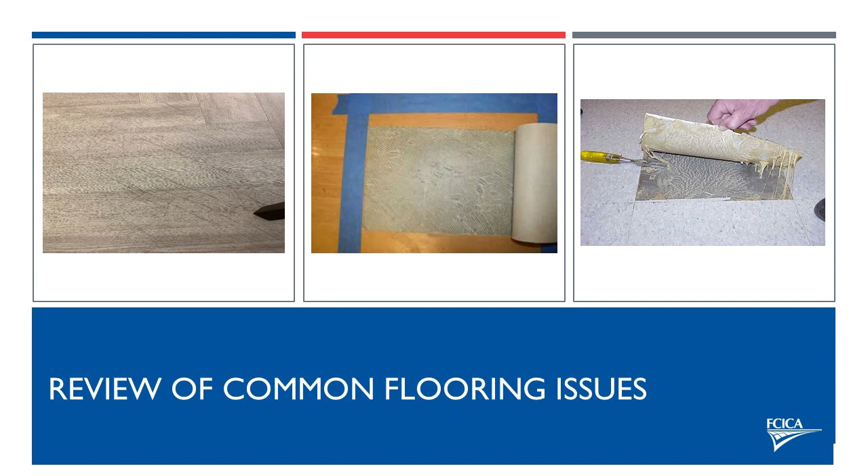So first we're going to review some common flooring issues, but before we do that, I like to take some breaks and do some quick Q&A. So, who is the initial decision maker in the event of a claim? I'll give you a couple of seconds to think about that.

According to the general conditions of the contract and AIA A201, the architect is the initial decision maker in the event of a claim. They're the ones that decide whether a claim should be filed, and they're the ones that should really be driving the claim in a commercial environment.

So some of the common commercial flooring issues we're going to talk about today: surface damage, discoloration, dimensional change, restriction of movement (mainly talking about click and floating floors), indentation, telegraphing, adhesive bonding issues, and substrate flatness issues, which we're going to talk about a lot through all of these.

One thing I want to point out is we're not going to talk about manufacturing defects, because you could have a whole other presentation on that. From my perspective, that's not something within the control of any contractor. A commercial product defect is an entirely different issue, and there's nothing a contractor, architect, or designer can do to avoid those. That's on us, the manufacturers.

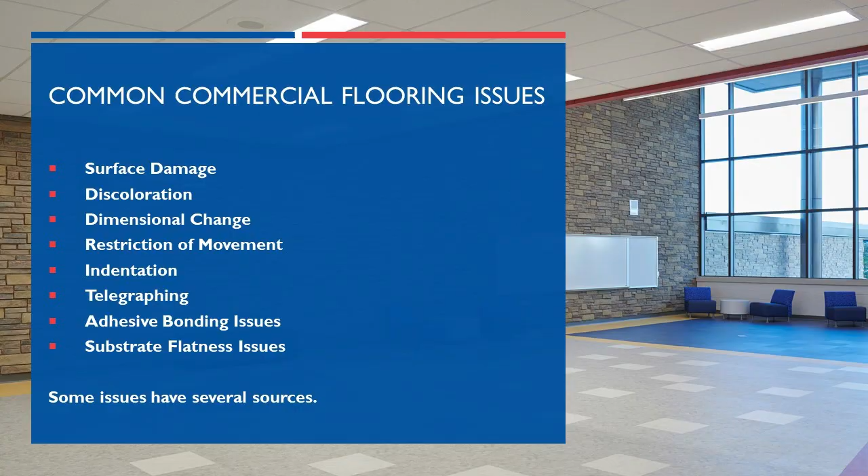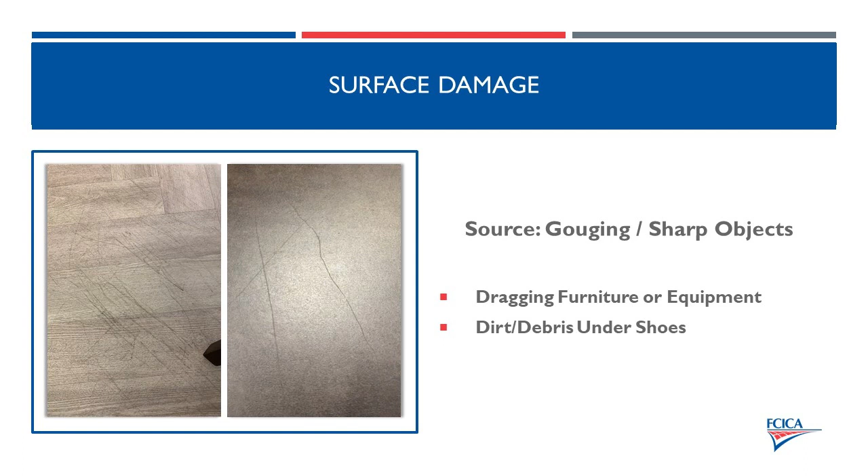So the first one we're going to talk about is surface damage. The first source is gouging or sharp objects, dragging furniture or equipment, or dirt and debris under shoes. Obviously, the majority of the time this is not a manufacturing defect—it's a site issue, but it's a pretty obvious one. I don't think there's any question about who's to blame and how to avoid this.

But this is a big one: improper or dirty floor protection is a really big issue, and it's something I see a lot in commercial environments, keeping in mind that we consider education a commercial environment, and multifamily is usually installed by commercial contractors, so we consider that a commercial installation as well.

Usually it's because of improper floor protection—in some cases no protection at all, which on the bottom right is just metal—or the floor protection for the specific piece of furniture is nylon or hard plastic.

The picture on the far left was in an elementary school, in a kindergarten classroom where they had wobble chairs to keep the kids stimulated while learning. The problem is wobble chairs are plastic—they pick up dirt and debris that the kids track in from outside, and it basically becomes sandpaper. If you see the purple one flipped upside down on top, it almost looks like sandpaper. And in the top right, that's a very common floor protector for metal chairs.

The problem is it's hard plastic, and a lot of times—especially if LVT is being used in the space, or really any product that doesn't have a finish and has a higher coefficient of friction—that nylon will be weaker than the surface of the flooring. It gets chewed up and actually transfers to the surface, creating what looks like scratches. It's actually a physical transfer of plastic to the surface, plus dirt accumulation.

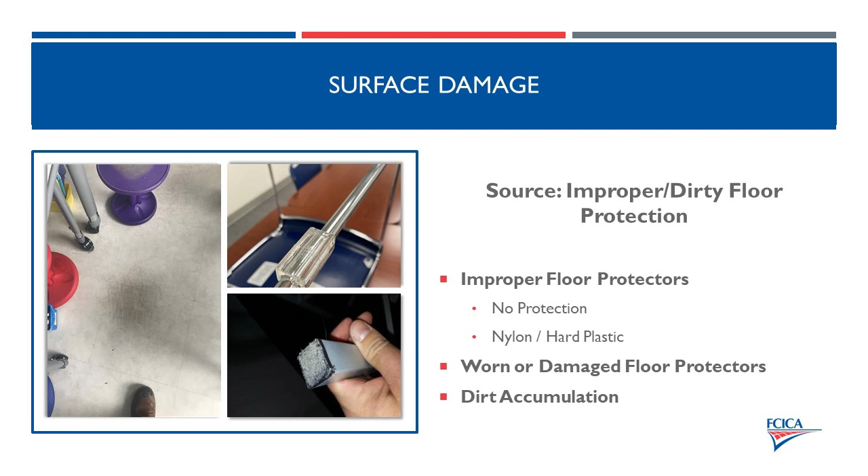So next, we're going to move on to discoloration. The first cause of discoloration is improper maintenance. In some cases, this can be adhesive left behind after installation for glue-down installations, or adhesive related to something installed adjacent to the flooring material.

But a lot of times, like in the picture on the left, it can be a film left behind from cleaning or disinfection. As COVID has continued through the last year and a half, disinfection has become more common in flooring, and it's important to realize you have to clean before you disinfect. If you don't, you're just layering disinfectant on top of it. The picture on the left is an example of when a film builds up on the floor.

This discoloration you see is actually from rubber tires off a hand truck that was spun in that spot, and it cleaned right off once it was actually cleaned. Another source of discoloration we see is film from drywall dust. It's really important to protect floors when wall work is being done, since a lot of times walls are painted or corrected after flooring installation.

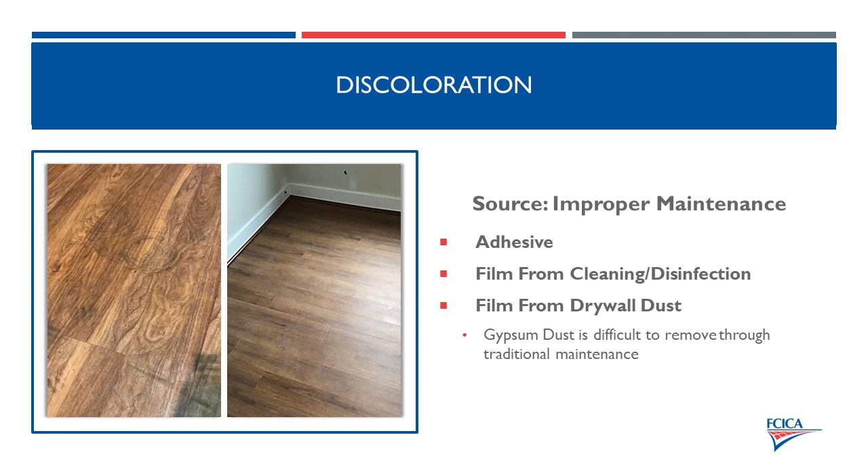Gypsum dust is very fine. It's a calcium salt, so it's very easily miscible in water. If you're just damp mopping the floor, it can spread the gypsum dust all over and create a haze. We sometimes get claims that a floor is hazy or not the right color, when it's actually just a film of gypsum dust on the surface, which is very difficult to remove.

Another source of discoloration is sunlight, UV and IR rays, which cause eventual fading in most floors over time, but natural products are especially susceptible. The picture on the left is cork. The dark color in the bottom left is the original color. The rest of the picture shows what happens after 6 years of direct sunlight exposure with no window treatment and no window films.

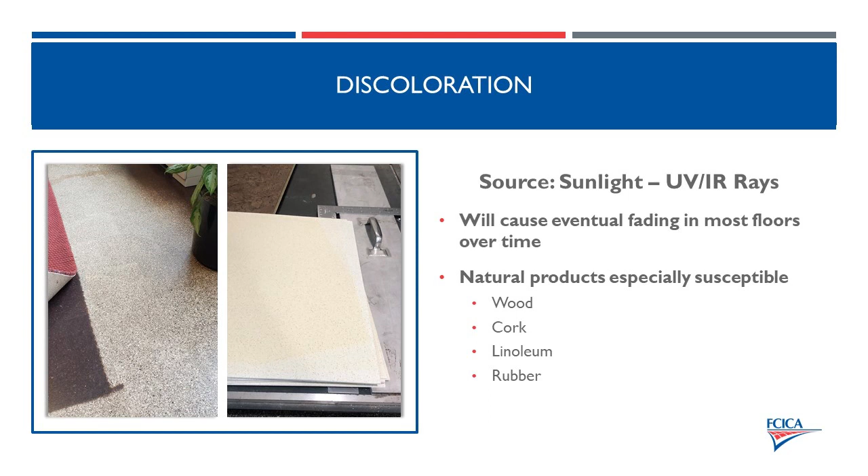This can happen in wood, cork, and linoleum too, though wood isn't a resilient floor and we're focusing on resilient flooring. The picture on the right is a rubber tile. Interestingly, with rubber, UV exposure often darkens the tile, so the darker area is the area exposed to sunlight. This flooring was opened on the job site and sat out in direct sunlight while they finished something else, and came back discolored.

Another, rarer source of discoloration is chemical attack. This can come from foot traffic, really a lack of walk-off mats. That's why most commercial manufacturers recommend walk-off mats, not just because rocks and debris tracked in on shoes can cause scratches and gouges on the surface.

In the picture on the left, you see the darkened area to the right. That's from a freshly paved asphalt parking lot. There were no walk-off mats in the building because the architect didn't like them, and the asphalt attacked the flooring on the surface and discolored it permanently.

You can also have chemical attack from underneath. The picture on the right is VCT tile that was attacked by a high pH in the substrate caused by a waterproofing admixture. There can be all sorts of contamination in the substrate that attacks products, especially vinyl, but even rubber—anything incompatible with the flooring material in the substrate can lead to issues.

Then there's abrasive or caustic chemical usage, which is fairly obvious—if you're using a really abrasive chemical in a laboratory or healthcare setting, that's going to lead to discoloration and potential chemical attack.

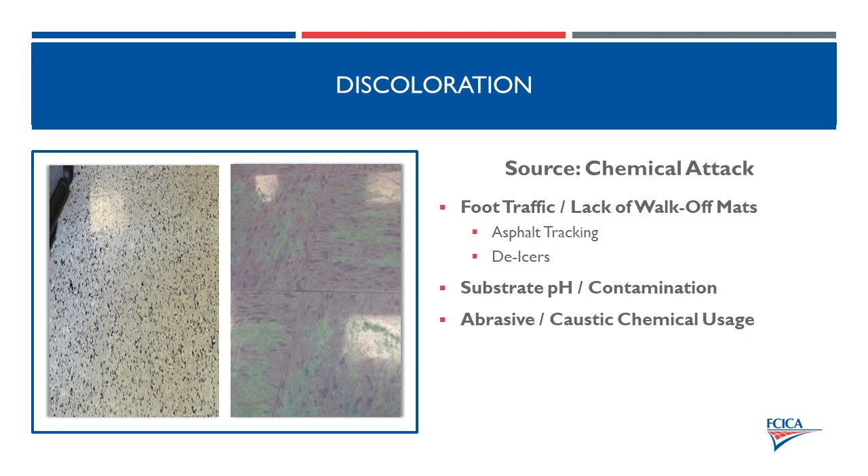So now we move on to dimensional change, an issue that can affect all flooring types—not just floating floors, but also glue-down floors. Click flooring is being used in commercial environments more and more. In fact, ten minutes before this presentation, one of our sales reps sent pictures of a recent installation in a healthcare setting—an outpatient office—where they used click flooring throughout. Click is becoming a lot more common in commercial environments, and I'll touch on it a lot because we see more problems with click than anything else. Dimensional change has two sides: expansion and contraction.

First is contraction. Usually what causes flooring materials to contract is a dramatic decrease in temperature, or in the case of cork, humidity. This issue is especially common in the Northeast and Midwest, where there are very large temperature swings from summer to winter. But it can also happen if the material isn't properly acclimated.

This happens more often than you'd expect, even in summer months, if the flooring or the space isn't properly acclimated. If you take flooring from a very hot environment into a space that's properly acclimated but much cooler, the flooring will contract if it hasn't acclimated and reached equilibrium with the actual temperature of the space.

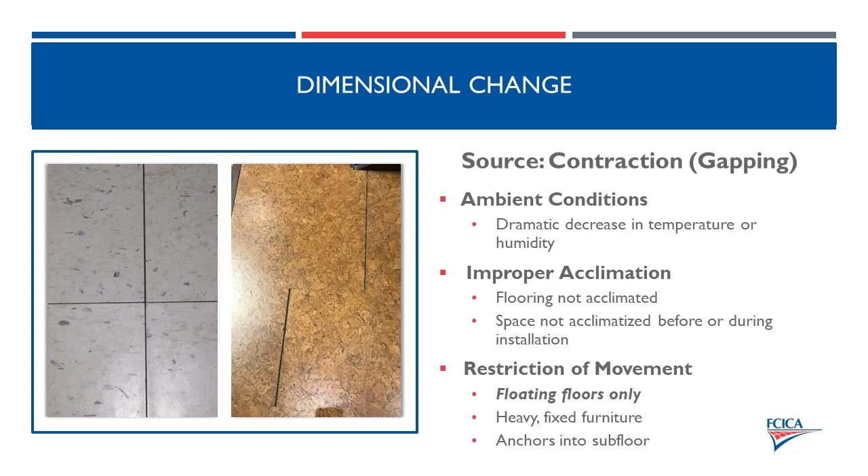So on the other side of that coin, from dimensional change, would be expansion, which usually results in buckling. Same thing, ambient conditions, but it's usually a dramatic increase in temperature.

The picture on the left was from an installation, it's a glue down installation. They were storing the flooring at about 19 degrees at that particular time, and the installers had the HVAC in the units, or the heating, set to 80. So it was going from 19 to 80 and getting installed immediately. Obviously, it was expanding over time and it was leading to some buckling issues.

But this can obviously also happen in click flooring, especially if there are any areas where perimeter expansion isn't being honored, which we're going to talk about in the next slide. But subfloor obstructions can also cause that.

I was at a job recently where the end user didn't want to pay for the prep it would take to properly prepare a difference in height between two concrete pours. They ran the flooring in the direction of that joint, and it was restricting the natural movement of the flooring.

So subfloor obstructions, but also existing flooring, or if you're going directly over a pressure sensitive adhesive, something that's very sticky, that can also restrict the movement of flooring, not allowing it to move over a long space. The flooring, the planks themselves, especially in a floating floor, are going to expand. If they don't have room to move, or if the planks near them can't move with them, then that will lead it to buckle up.

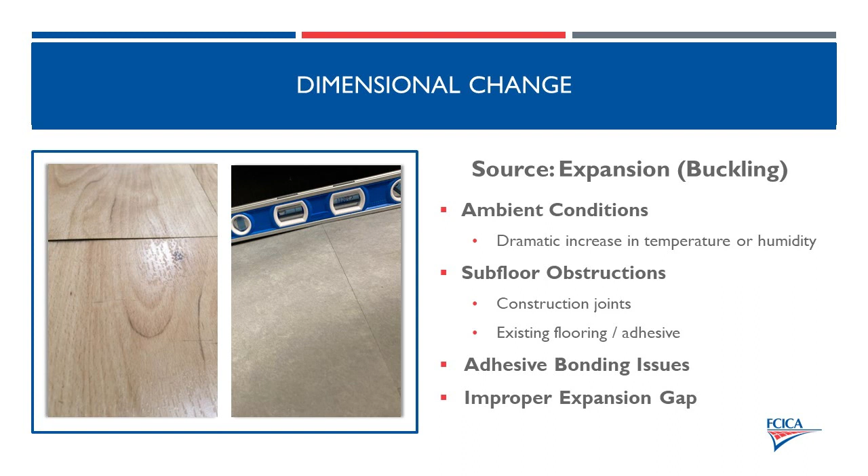But all vinyl products are sensitive to temperature changes, and when you have direct sunlight, that can heat vinyl products up to 120 degrees. And if the adhesive doesn't have the ability to help the LVT resist that natural dimensional change, that can also cause buckling as it moves, especially with large south-facing windows, or really any window that's seeing significant sunlight exposure that's heating the floor. And then, improper expansion.

So restriction of movement is a very common issue in floating floors, and most of the time it's due to an improper expansion gap, which all floating floors need, because you have to think of a floating floor as a gigantic tile, because everything is connected. And that tile is going to move as temperature conditions change.

I've seen installations where I get to the job site and they say, oh, the product's not as bad as it was in the picture. And that's because I came early in the morning before it had received a lot of direct sunlight.

Floating floors are going to move around. You'll more than likely not notice it ever unless you restrict the natural movement of the floor.

So not allowing for expansion, there's usually expansion required around the entire perimeter and any vertical surface. So if you've got a kitchen island in a multifamily environment, or some sort of heavy desk in a commercial environment, that would be restricting movement as well. It's supposed to have expansion around that.

Glass partition walls are a common thing, and obviously there's not going to be a transition or wall base installed against that partition, and nobody wants to see a gap there.

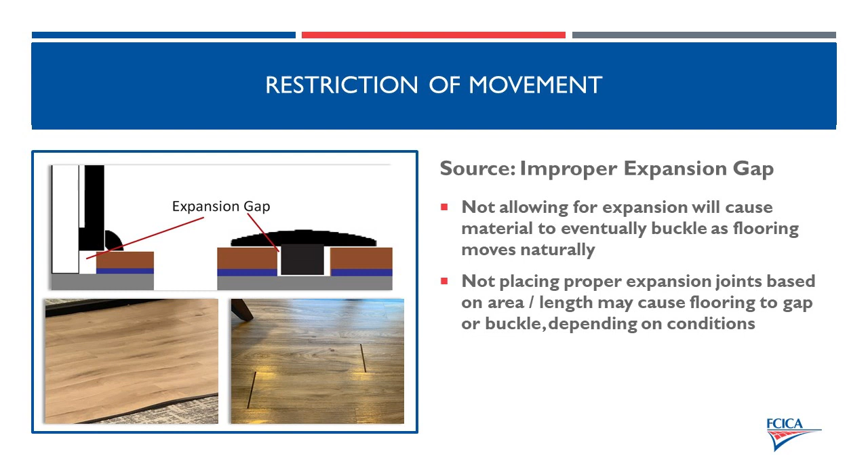And I've seen it, especially in the picture in the bottom right, a very large installation of an older HDF core click and lock product, installed in a 120-foot run, a thick product, and as it was expanding and contracting, once it was in the contracting phase, it separated. It was almost like a straight line as the joint staggered, where the flooring created its own expansion joint, which is what click flooring is going to eventually do if you don't give it the right expansion space it needs.

But another source is anchoring to or through flooring. So obviously, in the picture on the left, if you're going to drill a bolt into the concrete or the plywood through the floating floor, that floor is not going to move, and that can cause buckling or gapping. It's hard to see in that picture, but it was causing buckling up against where the flooring was anchored.

But then also transitions, and this is a big problem with floating floors in commercial environments, is nobody wants an overlap, and everybody wants as minimal a transition as possible. A lot of times with a traditional rubber or vinyl reducer or T-mold, some contractors say, well, I didn't want to glue the flooring down, so I glued it to the top of the flooring. If you use a real strong adhesive, in this case a construction adhesive, a really strong urethane adhesive, you just glued all of those planks together, which a lot of times they're clicked together anyway. But if it's going widthwise or if it's a large section, it basically traps all of those planks and prevents them from moving independently.

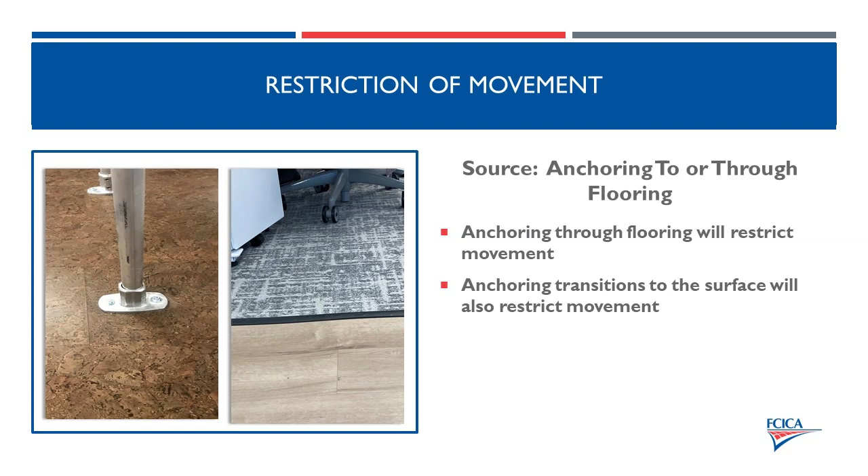All right, so now we're going to focus on indentation, which has a few different causes. The first one I'm going to touch on is adhesive displacement. This is in LVT, sheet vinyl, a lot of vinyl applications nowadays. Most of the time, the adhesive being used is a pressure sensitive or a transitional adhesive, whatever you want to call it. It's usually dry, so this is not necessarily an issue you're going to see a ton in vinyl, but a lot of rubber flooring products and specialty flooring products require a wet set adhesive to work correctly.

So believe it or not, it's still an issue that comes up every once in a while in vinyl as well. But usually when you're dealing with wet adhesive that's causing actual indentation, it's because the open time or flash time for the adhesive wasn't honored, there's too much adhesive and it's taking too long to cure, it's incompatible with the substrate, or there's concrete moisture and pH issues. The picture on the left is a cafeteria where it was going over a moisture mitigation product, which, great, they found they had high moisture. It was higher than the adhesive would tolerate, so they did the right thing. They put down moisture mitigation to cover it, and the adhesive they used was not approved for a non-porous substrate, and it never dried.

And you can see the lines from where the cafeteria tables were moved around for maintenance and all sorts of stuff. It was telegraphing right through, and when you pulled up a tile, the adhesive was totally wet.

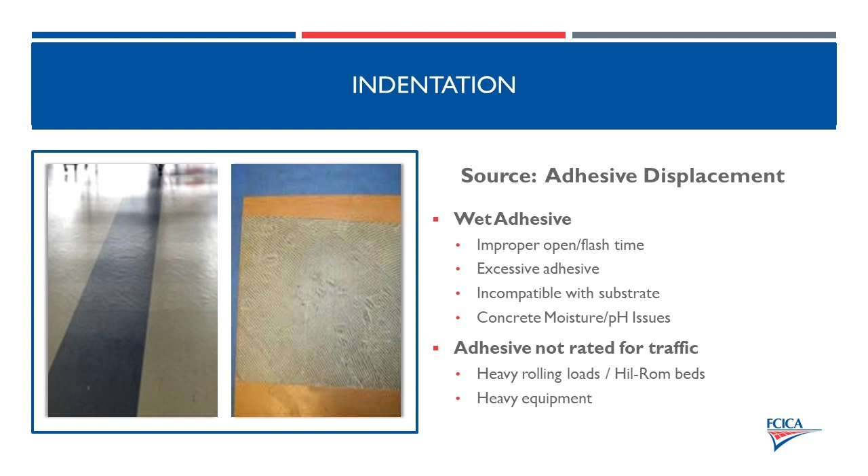So another source of indentation is heavy point loads, and a lot of times it's improper footwear.

It's kind of a weird topic. It comes up every once in a while where somebody's got indentations in material caused by stiletto heels, and we say, look, most manufacturers specifically call out, don't allow sharp pointed objects like stiletto heels to come in contact with the flooring. The picture on the right is an LVT.

The picture on the left is a cork floor. Obviously, cork is really soft, you might expect that. LVT might not, but you have to keep in mind that with a stiletto heel, maybe the person wearing them is light, but you have to factor in the actual flat contact point with the floor. So if you've got an 1/8 inch contact point with the floor and you're 100 pounds, that's 800 pounds of pressure if they're leaning on that heel for any reason. I don't know why they would do that, but obviously that compounds the heavier the person gets.

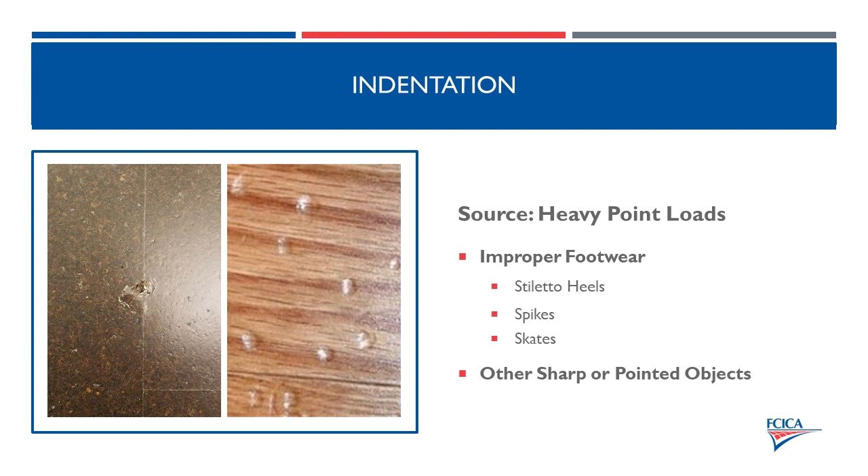But it can also be a problem for spikes, which is really mainly a baseball issue. Most other sports aren't using spikes anymore. But also ice skates. Anything that's going to put a heavy load in a small area, or even a normal load in just a smaller contact point, will lead to an indentation in almost any flooring, other than maybe polished concrete or hard surface tile.

Another source of indentation is improper underlayment. This is mainly a multifamily thing, but you do see it in commercial sometimes, where for sound reduction reasons, a separate sound control underlayment is being used. Most resilient flooring manufacturers have specific requirements for how thick that underlayment can be, what it's made out of. There are some restrictions there.

And the reason is the thicker the underlayment gets, the lower the indentation resistance of the flooring gets, especially the thicker the flooring, the worse that's going to be. So it's really important in these kinds of scenarios to make sure that the underlayment is rated for the traffic, but also that it's at the right thickness, because when you get into 5 millimeters, 10 millimeters, the indentation resistance of that flooring goes down significantly.

As you can see in this picture, those indentations were from what I would consider a standard hotel chair foot. It was 7/8 of an inch in diameter. It was a little smaller than what we normally recommend, but still what I would consider normal. And it was indenting with very little load, because the underlayment was way too thick for the flooring material.

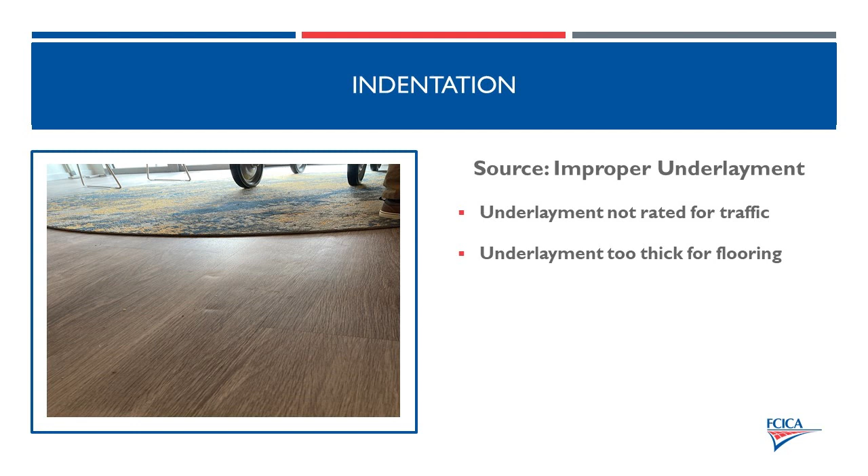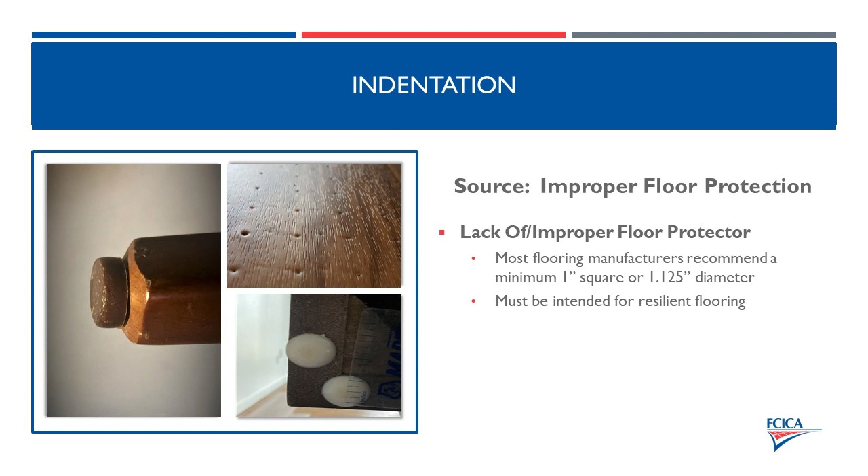So next is telegraphing. The majority of the time when you see really bad telegraphing, it has to do with the subfloor, and it's just improper subfloor preparation. Every resilient flooring manufacturer is going to say something along the lines of make sure you're patching low spots, there's going to be flatness requirements, but it's also going to say make sure the floor is smooth.

And you install the LVT with a water-based adhesive without ever really patching it. The LVT or whatever flooring product you put over the top is going to trap all that moisture in the wood, and just like it would if there were a dramatic increase in humidity, it cupped because the moisture had nowhere to go. But this can also happen.

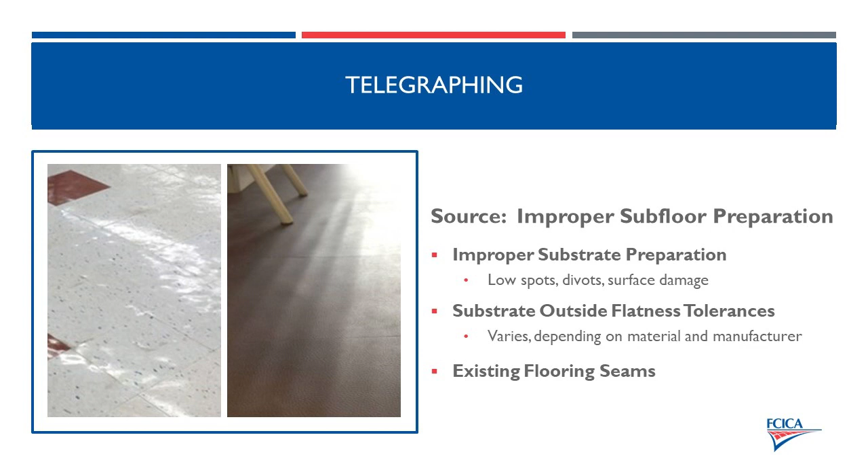And then improper adhesive installation. This is not super common, but it does happen.

In this case, this was just a case of the working time being exceeded. It looked to me like the installer troweled the entire floor and then tried to install everything. I don't know if they came back the next day or whatever, but whatever the case may be, it was clear that the working time had exceeded, and the flooring was actually telegraphing the adhesive trowel marks through the floor in the entire store.

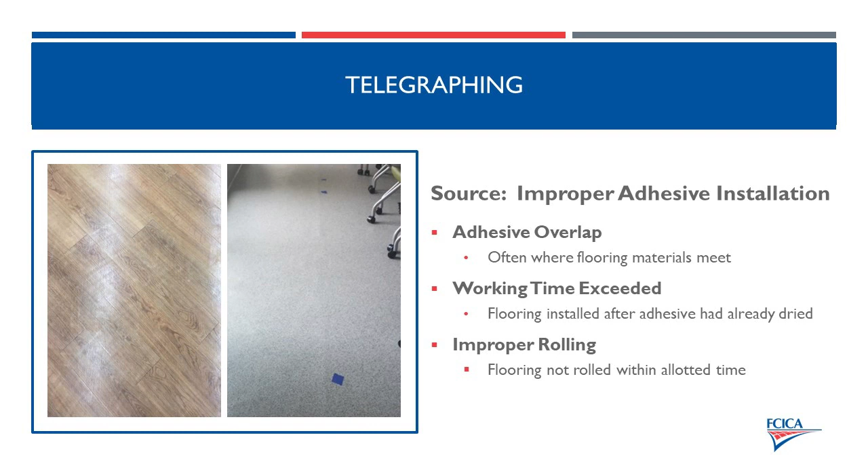But another thing is just not rolling it within the allotted time, especially critical with wet set adhesives for rubber products, which a lot of times are installed with wet set. If you don't roll that adhesive, especially if you've got substrate issues, if it's a little out of tolerance or you've got some low spots and the rubber doesn't get all the way into that adhesive, it could eventually conform and telegraph once the adhesive dries. So there's another source of telegraphing.

Another is improper substrate joint repair. Kelly Mortensen sent me a note in the questions, and I was waiting for this slide because this is actually related to stuff being pushed out of expansion, but expansion needs to be honored no matter what. Some people think, oh, it's a floating floor, I can just go directly over it, it's fine. And like Kelly was saying, that's not true. You still need to honor expansion joints even if it's a floating floor, especially because a lot of times a true expansion joint is a joint between two independent concrete slabs that will move independent of each other. And if one is moving differently than the other and there's a height difference, that could cause a problem for the floating floor because floating floors really need to be flat.

When we're talking about joint repair becoming a telegraphing issue, it's usually in the case of an expansion joint. All manufacturers should say that you have to honor expansion joints in the concrete because it's basically two separate concrete slabs that happen to be next to each other, and you have to allow those slabs to move independent of each other. Most of the time you want to use a joint covering system, but there are also flexible repair compounds you can use. They're usually a bit more onerous on the installation side, but you have to honor them.

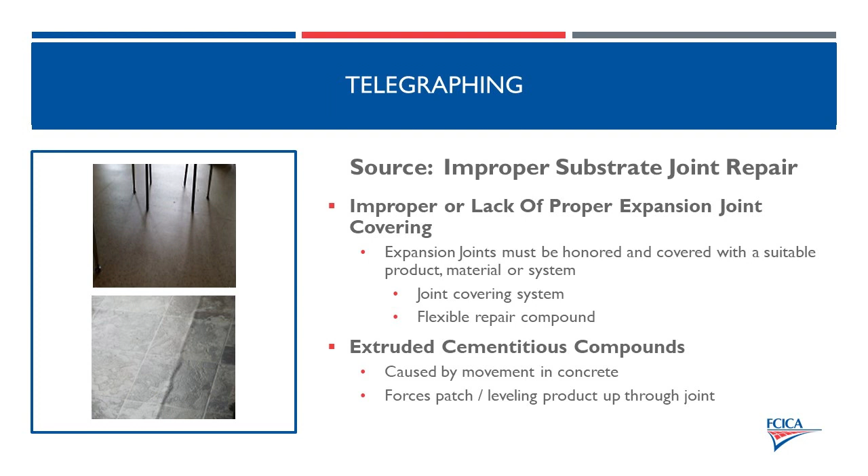That's why, when you're covering wider cracks that are normal cracks in the concrete, you have to use a product that's suitable. So, adhesive bonding issues - I'm not going to touch too much on this.

I'm sure all of you at some point have sat through a moisture presentation from one manufacturer or another, but it bears repeating because it is an issue. It doesn't come up as much as it used to, but it still does. Concrete moisture and alkalinity - if there's not a vapor barrier beneath the slab, especially if it's an old slab, if the adhesive is not capable of resisting pH in the concrete, and there's no moisture mitigation involved, those three things especially will normally lead to...

Adhesive issues, whether it's sheet goods or tile, it doesn't really matter. It affects everything more or less the same.

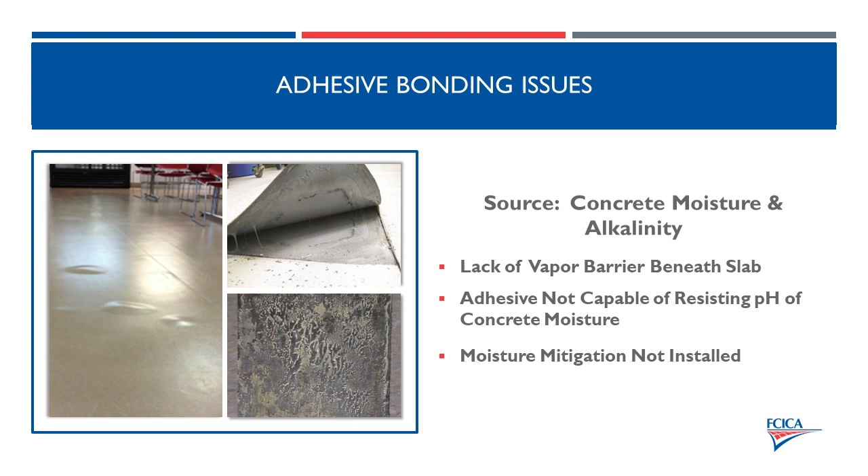But another thing is just incorrect usage or incompatible material. Not all adhesives are rated for all products. I don't care if it says multi-purpose - they don't work well for everything.

This test board is a really good example of how different adhesives and different flooring products interact with each other. Usually when you have an adhesive bonding issue due to some incompatibility, it usually means the adhesive isn't suitable for the floor covering. If you look at the pictures on the right, that tells me that adhesive is not compatible with that flooring product, or it's not suitable for the substrate.

If you look from the left, the first and third pictures are a good example of it not bonding to the substrate. It's very common in non-porous substrates.

Moisture mitigation is a non-porous substrate, as is fire retardant plywood. There are lots of different green or fast-track products being introduced in commercial buildings, especially multifamily. A lot of times those are tricky to install, and the manufacturers of those products say you have to put regular plywood over the top because they know it's hard to bond to, or you have to use a urethane, which is annoying and expensive. So that's another source of adhesive bonding issue.

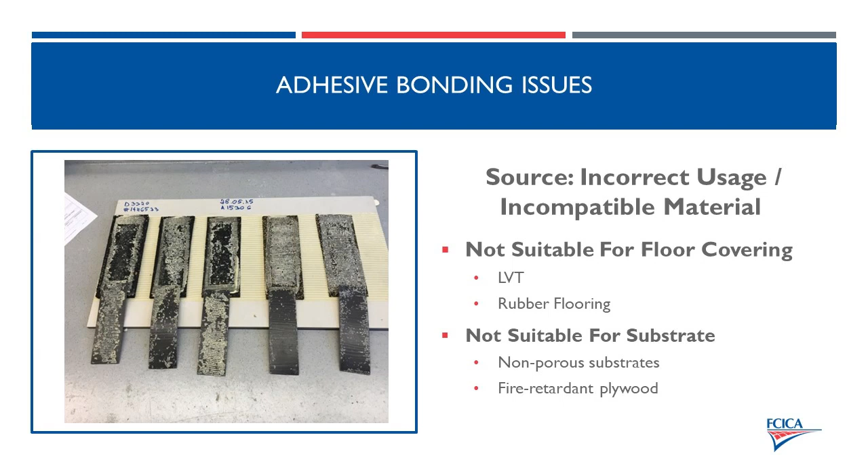And then a rarer source of adhesive bonding issue is substrate contamination. Not super common, but you could have hydrocarbon contamination, especially if it's a building that's being repurposed - an existing commercial building. I've seen heavy equipment maintenance buildings or vehicle fleet maintenance buildings being repurposed into offices. Oils, grease, fuel, stuff like that will leach into the concrete, and you might clean the surface and think you're squeaky clean, but what's underneath is all those hydrocarbons that will migrate up, especially if there's some moisture.

But you can also see hydrocarbon contamination from pipe cutting. So if it's new construction and you've got somebody cutting pipes, especially for overheads for sprinkler systems, but also heating equipment. And then there's also adhesive removers like cutback or asbestos removal.

If you think about it, a lot of those products are designed to break down one of the strongest adhesives we've ever known in the flooring industry. You can imagine what your acrylic going over the top is going to do if that adhesive remover isn't totally removed. But also solvent-based products can break down adhesives. Most adhesive manufacturers tell you to use a solvent to clean it off products, so you can imagine what solvent will do to the adhesive. And then curing compounds or sweeping compounds.

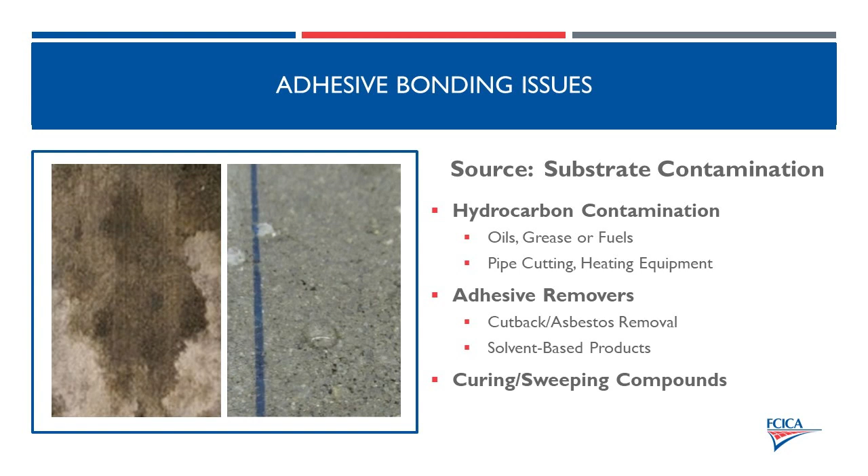Most times curing compounds should be walked off by then, but they can still cause issues. Sweeping compounds will also be a bond breaker for most adhesives. And then finally, excessive topical liquids.

Someone forwarded me a presentation that was given at Greenbuild this year, aimed at end users to help them avoid adhesive issues related to cleaning and disinfecting and new cleaning and disinfecting procedures that a lot of healthcare and commercial facilities have put in place. I thought it was interesting and timely, given I was giving this presentation.

This is definitely an issue, especially for acrylic adhesives or adhesives that are not waterproof once cured. Excessive cleaning liquid - I was in the military, and the picture on the left is obviously a guy in the military. That's how I cleaned every floor, just get as much liquid as you can get on it, because sometimes you have to wait till it dries before you're done. So it's a built-in break.

But anyway, excessive cleaning liquid - most resilient flooring products will say damp mop only, and that's because the adhesives they're installed with, if they get enough routine heavy topical water exposure, can lead to adhesive issues.

And continuous exposure in wet areas - not many resilient products are designed for wet areas. Most of them, if they're going in a wet area, should have a waterproof adhesive used, but if it's not, that will cause a problem. I've seen it in commercial bathrooms a lot, under the sink, where water usually collects.

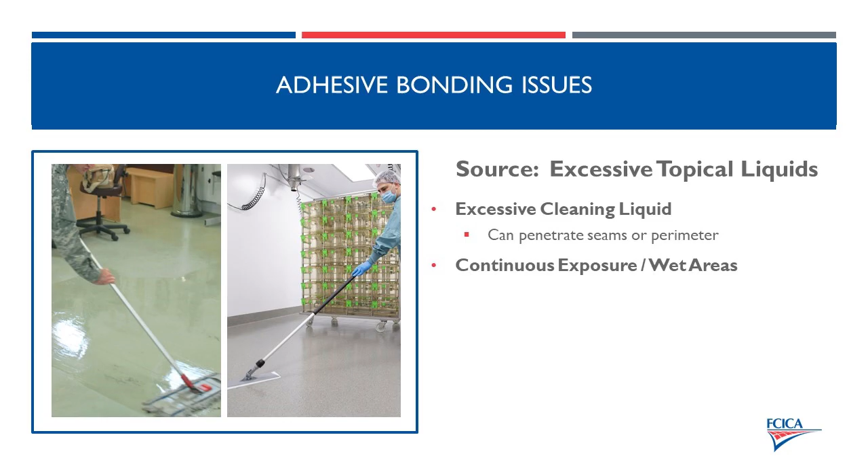All right, so now we're going to talk about avoiding common flooring issues from a substrate preparation standpoint. But first, I have a quick polling question: is product data considered part of the construction contract?

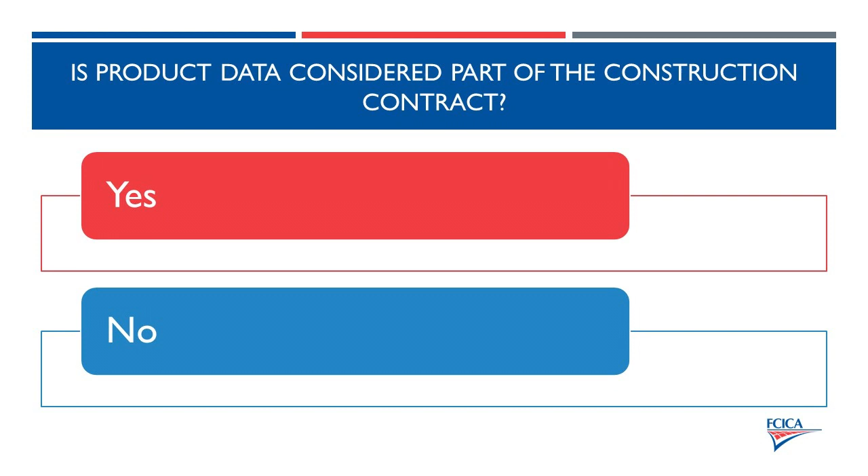Believe it or not, it is not, unless it's specifically in the contract. Submittals are not technically a part of the contract - they are separate unless the contract specifically includes product data for whatever reason. That's why it's really important for architects, especially, and design-build firms to make sure they're incorporating correct prep into it, because they can't fall back on the product data. And anything that augments the contract is a change order, and every contractor loves a change order.

So for the causes, I went from the top down, from the surface of the flooring to the concrete. For addressing how to avoid some of those issues, we're going to go the opposite way - we're going to start with the concrete.

Obviously, the first thing you should do with concrete is conduct concrete moisture testing and evaluation. The reason I throw evaluation on there is you might not always need to test. So the first thing you need to do is determine if there's a proper vapor retardant sheet underneath the concrete, and then determine if there are concrete moisture requirements for the flooring and/or the adhesive, and then conduct moisture testing per that manufacturer's requirements.

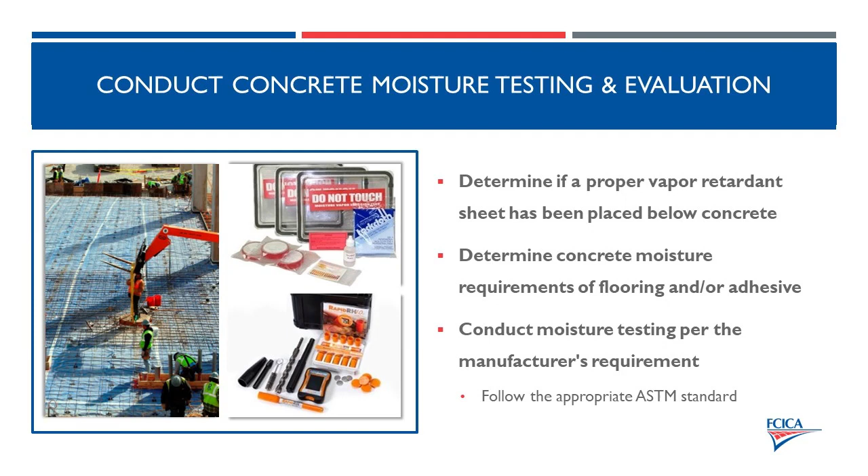Not all manufacturers require it anymore, so it's really important - you could have high moisture and go to the manufacturer and say, hey, I've got this, and they might say it's fine. You really have to make sure you're looking at the manufacturer's requirements. I know you don't always have that ahead of time, or you don't always know which flooring is selected - you might want to go ahead and do moisture testing anyway. It's cheap insurance, and now you know.

But once you've done that, or really looking ahead if you know you're going to do moisture testing, in case of high moisture, have contingencies in place. Sometimes that might be a part of the actual contract, sometimes it might not - a lot of times it's not, and then you're scrambling afterwards to try and find a product that's compatible with the flooring and all this. So have a contingency in place ahead of time, especially if the flooring products involved are known to require moisture testing.

This may not be the case for floating floors - a lot of floating floors, you just put down a polyethylene sheet and that's it, you're done. But a lot of glue-down products are going to have some sort of requirement. It may not be moisture testing, it may be that you need a vapor retardant sheet, or that it needs to be 28 days old. Just make sure you know what those requirements are, make sure you have a contingency in place, and make sure they work with all of the products, because scrambling afterwards is not ideal when you're dealing with a moisture issue and construction deadlines.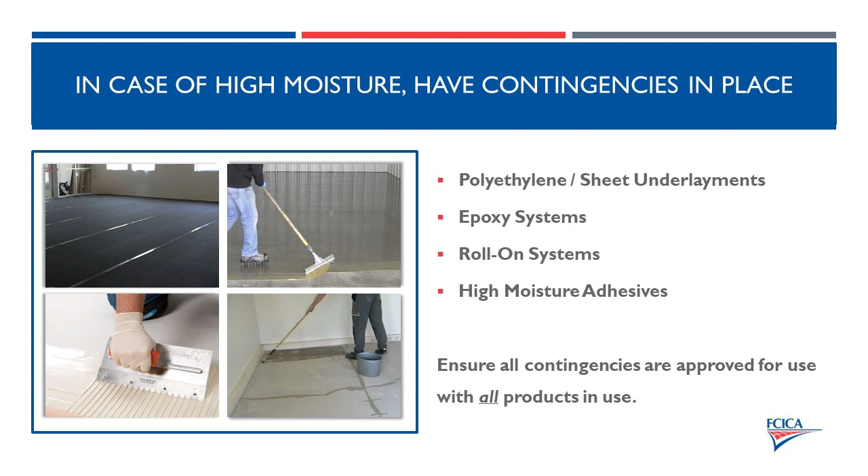Test the substrate for abnormalities. Substrate flatness is getting worse and worse and worse—something I almost never dealt with 5 years ago, and now it's extremely common. For whatever reason, a lot of flat work guys are convincing GCs that the flatness can go as bad as

an FF of 20, which is like a half inch in 10 feet. That's insane. But the other thing is, with the increase of click products, a lot of people think, oh, well, I don't need to flatten it because I'm using a click product. But the thing is that all rigid core products that comply with the ASTM standard are still flexible. They still have roughly 30% PVC in them, even though there's other ingredients that make it more rigid

than a typical sheet vinyl or LVT or rubber. It's still flexible. And if that product flexes due to a deviation in the substrate, it'll eventually break the locking mechanism. Locking mechanisms are not trampolines. They're not designed to bounce. So if they bounce enough, they'll break. So substrate flatness is super important if you're installing click flooring. A GC might tell you otherwise. They don't know what they're talking about.

So ensure substrate is compatible. So anyway, I jumped ahead a little bit, but you want to make sure the substrate is compatible with the flooring type. That's important with newer substrates, ExoCore, some fire retardant stuff. There's lots of different substrates out there now. Make sure everything is compatible.

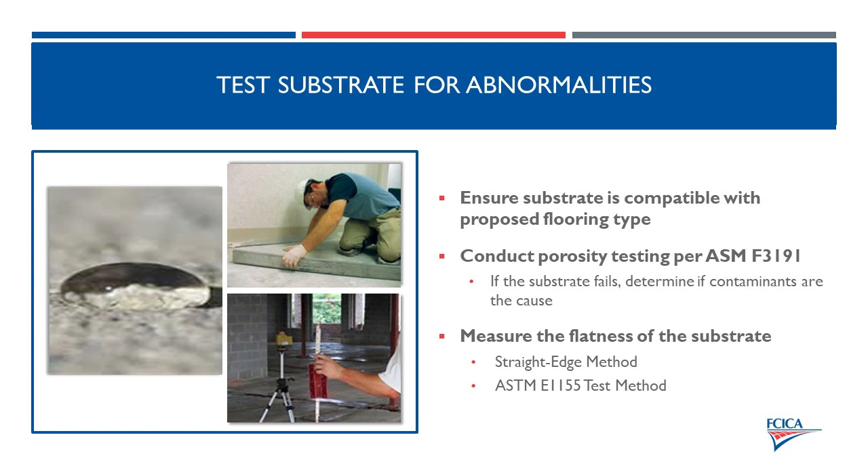But Kelly's absolutely right. So once you've done all that—your moisture testing, determined whether the substrate is porous or not, determined whether the substrate is within the flatness requirements of the actual flooring product—it's time to repair it. Properly prepare it and repair anything that needs to be repaired.

Every flooring product has a flatness requirement. It's easy to test for. It's really easy to determine substrate flatness. As someone who deals with claims, that's an easy claim to deal with, because straight edges don't lie a majority of the time. And usually when there's a problem, it's really bad. It's not like it's an eighth of an inch out of flatness—it's a quarter inch or more. I've seen floors that were as much as an inch out of flatness, and these were newly poured concrete slabs.

And honor all expansion joints. And then use a cementitious compound to flatten all areas to comply with the flooring requirements. Sometimes all that's needed is patch, or all that's specified as patch, or all that's in the budget is patch. Sometimes you can actually level.

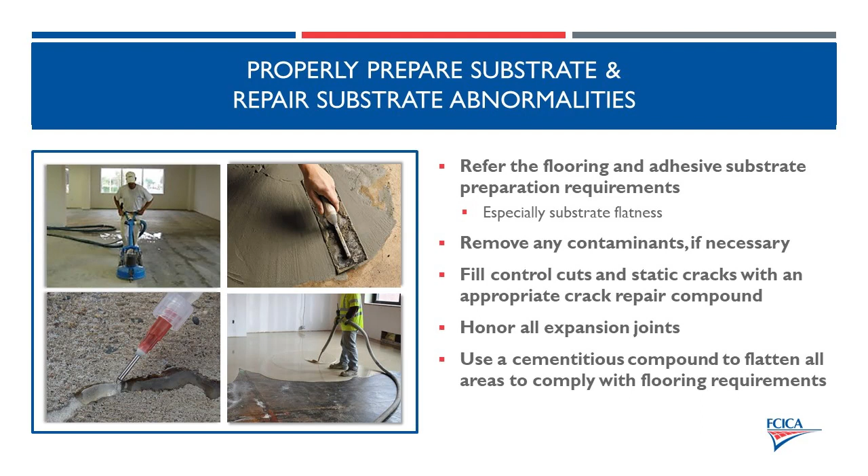Whatever you do, make sure you do that prep. Like Kelly said, it's especially in click products, it's a big problem.

All right, so now we're going to talk about avoiding common flooring issues from flooring selection. And I know contractors don't always select the floors, but you're the last one to touch it, and sometimes the first person to say, this is the wrong product, we're going to have a problem.

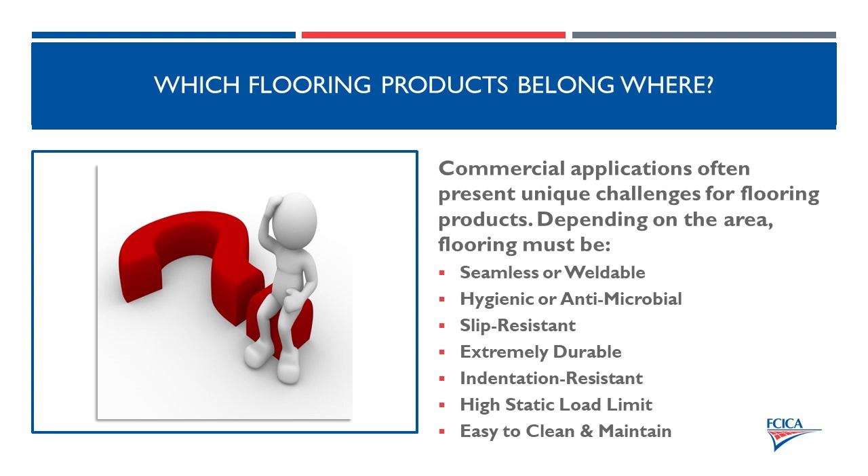anybody involved with the project needs to keep in mind. So the first thing I would say, I say this to contractors all the time, make sure your product meets the specification. The specification is there to protect the contractors from bad manufacturing. So make sure that the product complies.

There's a standard for every single product that you use. ASTM, to become a member, I think it's $75, $80 a year, and you get free standards, you get a free copy of all the standards within F06, which is all of these standards and more. It's cheap insurance, and then you can reference these documents and say, hey, wait a minute, like this product, it's very common, especially in vinyl products, but even in rubber products, that products clearly

don't comply with the standard. And there is a rigid core standard, and there's a lot of products coming in offshore in rigid core that don't meet the standard. So it's really important to make sure that the product you're using meets it. It's a little extra research you can do on your side, because you know what, like it or not, no matter whose fault it is, if there's a problem, it costs everybody money, including you, even if it's not your fault.

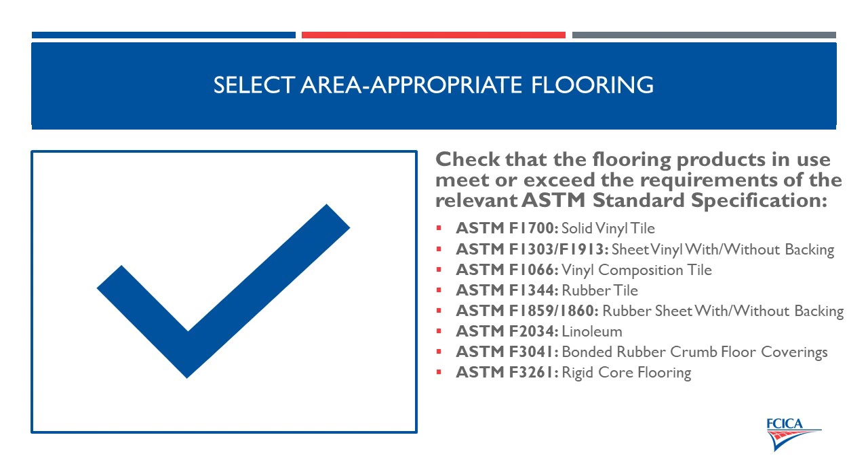So flooring may be required to meet specific requirements. Static load is sometimes used as a benchmark to see if products can withstand a certain weight without indentation. Coefficient of friction, this is determining slip resistance, and then chemical resistance, especially in healthcare, or laboratories, but mainly healthcare. They're usually going to ask if there's specific chemicals that this product can withstand. A lot of times contractors end up having to gather that information and submit it.

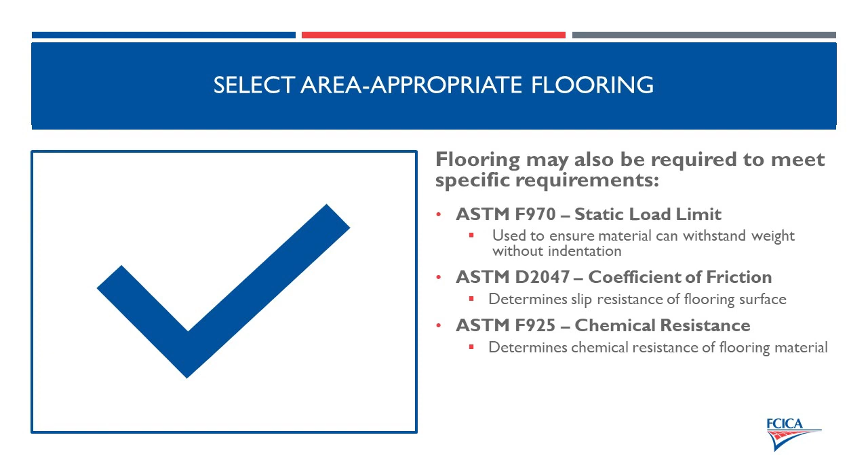And then flooring must be warranted for the space. And that's not something that contractors should have to worry about or deal with. But if you know a product is not rated for a space, don't install it. At least bring it to someone's attention, because it's a claim waiting to happen, and it's going to take time.

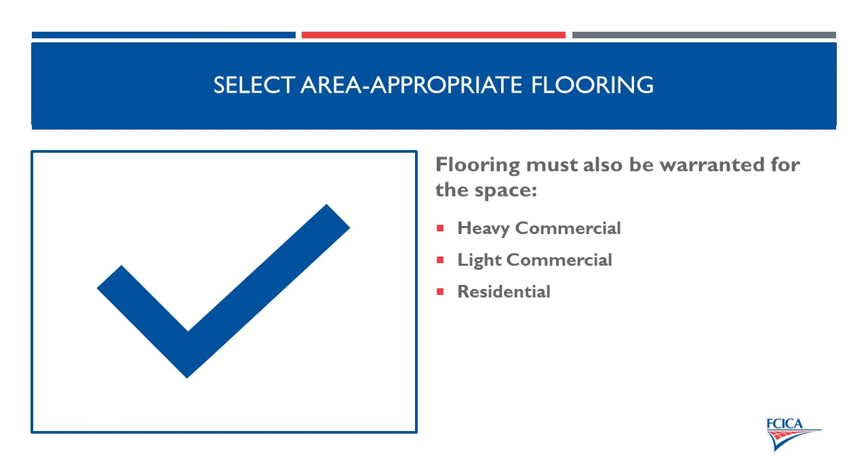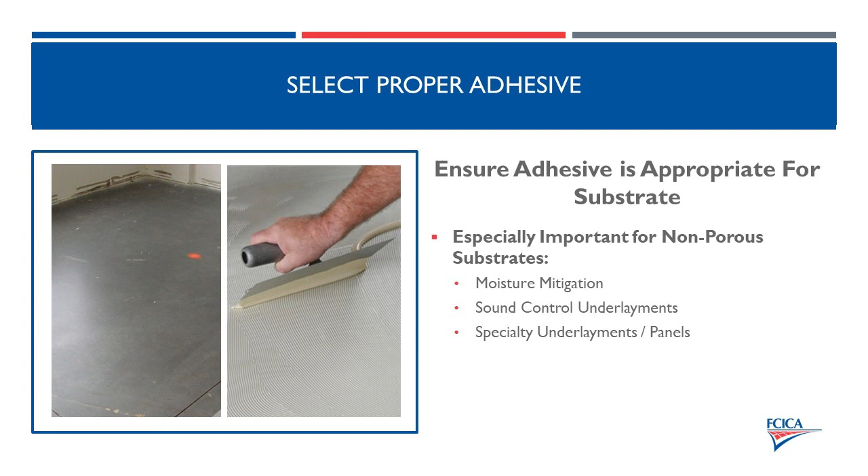And time is money. So selecting proper adhesive, make sure the adhesive is appropriate for the substrate, especially if it's non-porous, if it's moisture mitigation, if it's a sound control underlayment like a rubber or a foam, if it's some sort of specialty underlayment or a specialty panel, make sure the adhesive is appropriate. That's an easy claim to deny for me. And then make sure the adhesive is appropriate for the flooring material.

I can't count how many times somebody's tried to install something with carpet adhesive because there's a ton of carpet on the job and they just thought, it'll work. A lot of times it doesn't. This is especially important if there's more than one product type. But there's some flooring products that have specific requirements.

Cork is a good example. Cork is a resilient flooring product. Might be made of wood, but it falls under our category. And then rubber, usually rubber products have specific adhesive requirements. And PVC free flooring, notoriously hard to bond to. So they usually have specific adhesive requirements as well.

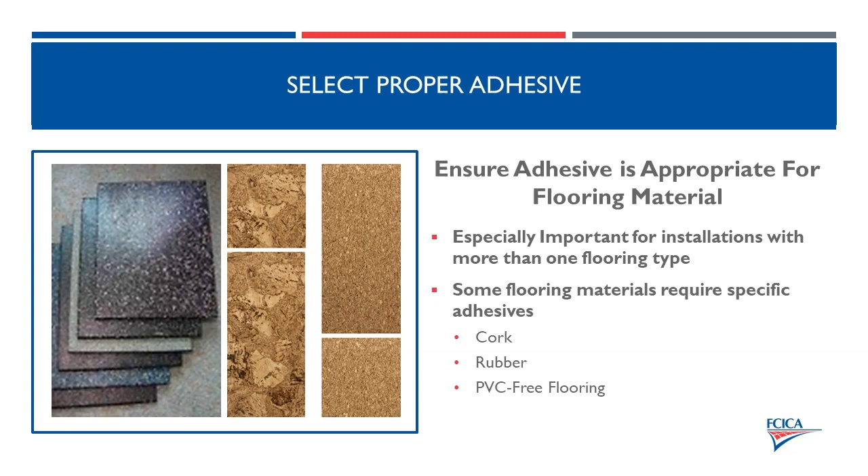Architects make mistakes in contract documents with adhesives. Just because it's in the document, do your research and make sure that it's compatible, because they'll try to tell you that you're the professional and should have known better.

And then be aware of the final use of the space. If you know it's going to be real heavy use and you're using a really inexpensive light use adhesive, say something. If you know that the area is going to get a lot of UV IR exposure and you're using a pressure sensitive adhesive, you might want to double check that it's compatible.

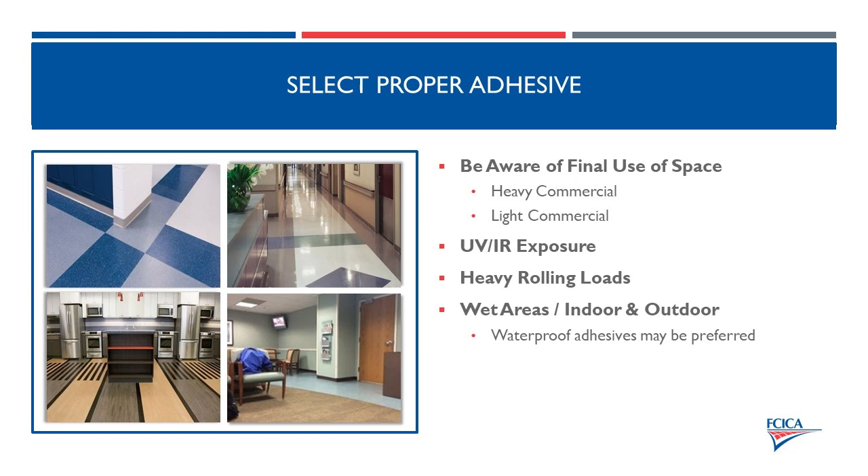Heavy rolling loads, in areas that have heavy rolling loads, Hill-Rom beds, stuff like that, there's going to be specific requirements. If you're using a trowelable acrylic adhesive, there might be problems down the line. And then wet areas, whether it's indoor or outdoor, usually a waterproof adhesive is going to be preferred in these situations. And then for products that don't require an adhesive, allow for proper expansion.

Like I was saying, 50% of all click claims are related to substrate flatness. The other 50% are improper expansion. And there's all kinds of excuses that are used.

Oh, the architect didn't want to use an overlap transition. They wanted to use a Schluter. They didn't want the gaps exposed around the door frames. Oh, we couldn't undercut the door frames because they're metal. Doesn't matter. You have to allow for proper expansion around the entire perimeter and all vertical surfaces. Around door jambs especially, that's a lot of times where flooring gets caught when it expands.

And then use spacers and wedges to ensure the gap is honored. They're cheap. You can get like a 50 pack from Home Depot for $10 or something like that.

I was in California last week denying a claim because they installed 130 feet of continuous flooring and it was failing, because they didn't put an expansion joint in.

And then transitions. Make sure the transition allows for expansion. Schluter makes one transition that allows for expansion. If there's Schluter and it's click, there's a problem. Most rubber and vinyl manufacturers don't allow for expansion. There's a small offering that does.

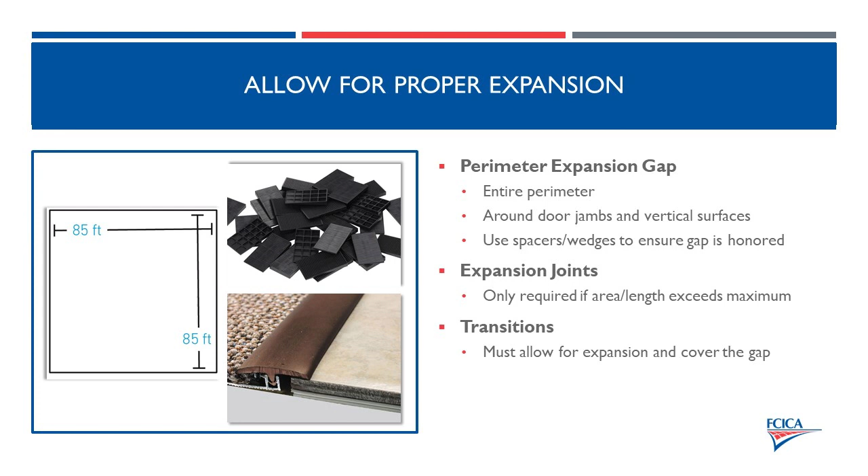And then perform proper maintenance before turnover. You're not responsible typically for long-term maintenance, but that initial turnover is huge. And when we talk about gypsum dust and stuff like that, if it's not clean when you turn it over or they have a problem afterwards, you're still going to go back and have to deal with it every time.

So use manufacturer recommended maintenance methods, and then follow the heavy cleaning instructions if you think you have a problem. Every manufacturer is going to have some sort of instructions of if you've got a problem, if it's not getting clean, if there's heavy dirt accumulation, however they word it. Make sure you follow because every manufacturer has them, especially if there's adhesive on the surface or if you've got gypsum dust on the surface.

Gypsum dust is really, really hard to remove. You have to agitate the surface of the floor and remove the dust all in one fell swoop. If you just try and damp mop it, it's just spreading it, and it'll take 6-7 times before you get it all up. Whereas if you use an auto scrubber or use a dual mop bucket system or something that actually removes stuff from the floor, that's a way that you'll get that up.

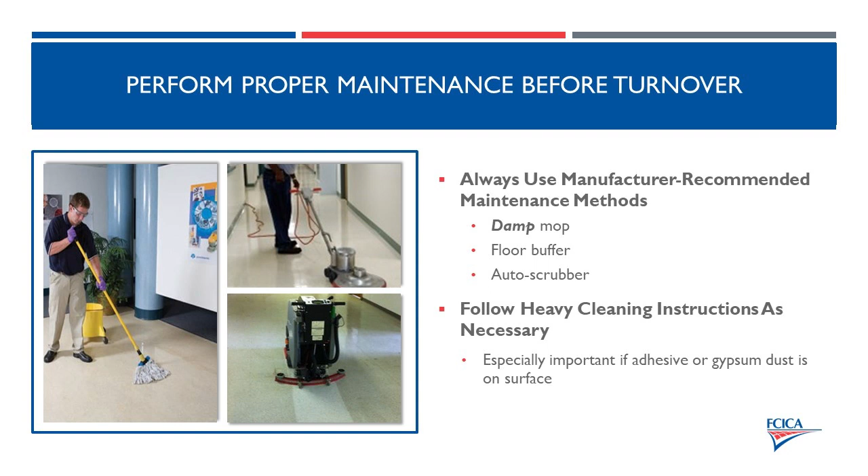Share important documents with the end users. Maintenance documents are a no-brainer, but one thing I really emphasize to contractors is make sure you share proper floor protection. I know that no contractor is responsible for putting the floor protection devices on the chairs and the tables, but share that information with the end user, because end users are usually pretty frustrated when they have all this new furniture and it's all made with nylon that is just getting torn apart because the nylon is weaker than the floor that they're putting over it, and there's no wax on it.

So there's more friction between the two surfaces. And a lot of times what happens, the nylon breaks up, it accumulates underneath, it's usually black nylon, so it builds up on the surface and it just looks gross. And it's not entirely a maintenance issue. It's literally just the nylon is not rated for most resilient flooring products. So share that with the end user.

And then the warranty, especially exclusions.

There's exclusions in most warranties that tie directly to end use, not just you as the contractor, what you're supposed to do, how it's supposed to be installed, but also what kind of abuse or loads it can take. A lot of times that's in the warranty. For you to prevent the callback, make sure the end user is aware of what those exclusions are, because they may do things to the floor you're not aware of. That happens a lot, especially with floating floor, anchoring stuff to it, or putting transitions in that don't allow for expansion.

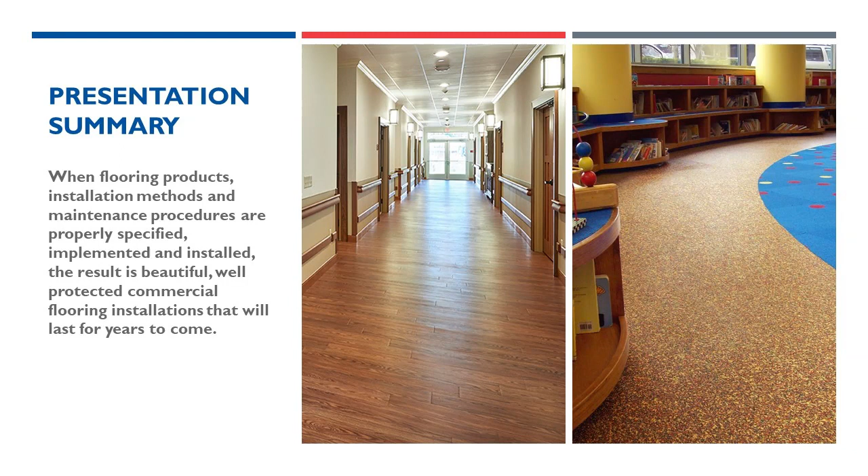So that's the end of my presentation.

Hussein had a question: what do you recommend to contractors when the customer selects all of the material and you are only there for labor, and you notice that the glue the customer selected is low quality and will cause failures? You notify the customer and they say, no, we want you to use this material.

That's a great question, and I'm not sure there's one right answer. Some people would say get a release of lien or some sort of release of liability. I've heard the enforceability of those is tricky depending on where you are. But yeah, I've dealt with this before, where a contractor says, hey, they're trying to make us use this glue, can you help us out? Then I jump on a conference call with the GC, the end user, the architect, whoever is involved.

Usually what I say in those situations is, you can install this, but I'm going to tell you what your limitations are. Here's what could happen, and here's what we're not going to cover. And by the way, I know this job name now, so it's going to be really easy for me to reference later when I search my email and find the follow-up email I sent saying, hey, don't use this glue, and here's why.

One thing I try to say: very little actually voids a warranty. You can't say, oh, you used a third-party adhesive, so you have no warranty. It's not true, and that ideology has been thrown out in court time and time again. But one thing you can say is, if you use a third-party adhesive, we'll still cover the manufacturing defect part of the warranty, and we'll still cover the wear part of the warranty. But if there are any issues related to adhesion, they will not be covered.